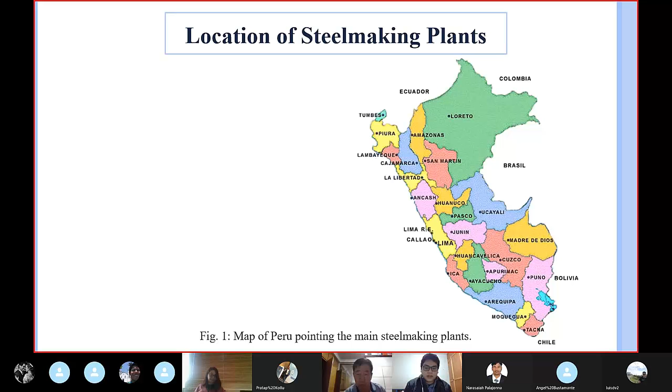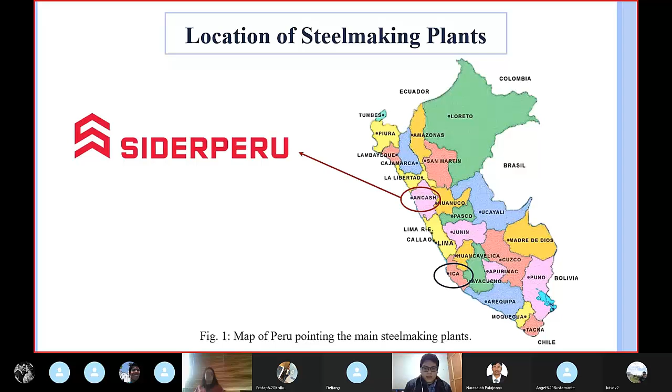Let's start with the most important point, that the production of steel is an important indicator of the development of a country. This is a map of Peru, where I live, which has two main steel making plants: one located in Chimbote, in the region of Ancash, that's SiderPeru, and the other located in Paracas, Ica, that's Aceros Arequipa.

Let's start with SiderPeru. I want to tell you a little story about it: it was founded as a national company during the government of Peruvian president Manuel Odría. It remained a national company for many years. However, in 2006, Gerdau, a big Brazilian company specialized in steelmaking, acquired more than 85% of the shares. So nowadays, SiderPeru is more Brazilian than Peruvian.

To produce steel, there are two main ways: one is to employ the blast furnace, and the other is using electric arc furnaces. In the case of SiderPeru, the blast furnace is not operating due to financial problems, so it's cheaper to import the product than to produce it here. Because of that, the blast furnace is not operating, so what SiderPeru does to produce steel products is use the other way: the electric arc furnace, employing scrap.

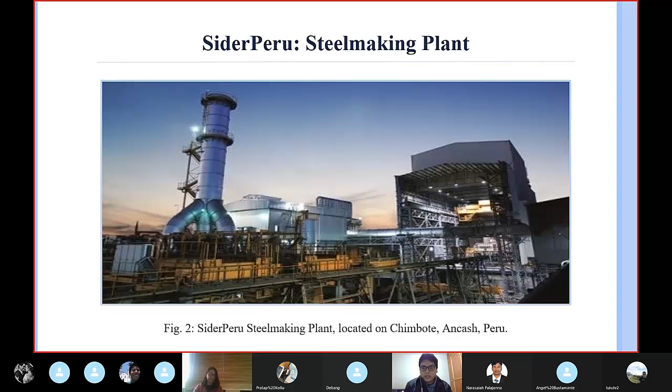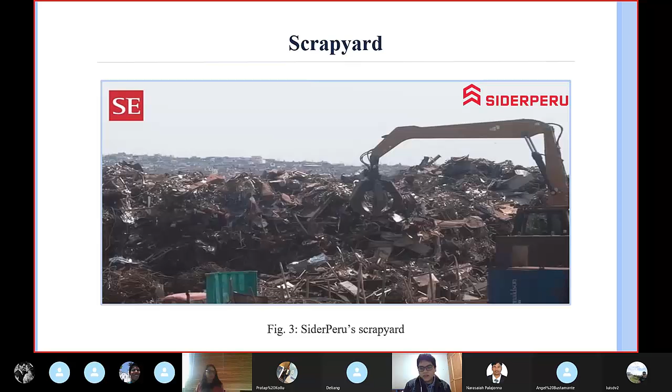What SiderPeru does here is recollect and reduce the size of the scrap. So once the scrap is reduced in size, it goes to the electric arc furnace.

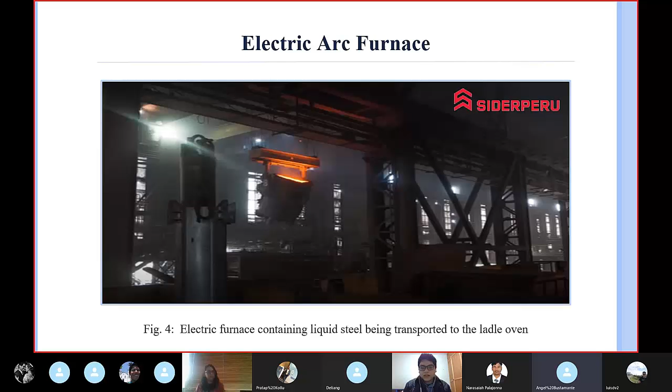But before talking about the Ladle Oven, I want to mention that during this stage in the electric arc furnace, we obtain two types of slags: one from the gases that the furnace emits, that is type 1, and the other are black powders that settle on the bottom.

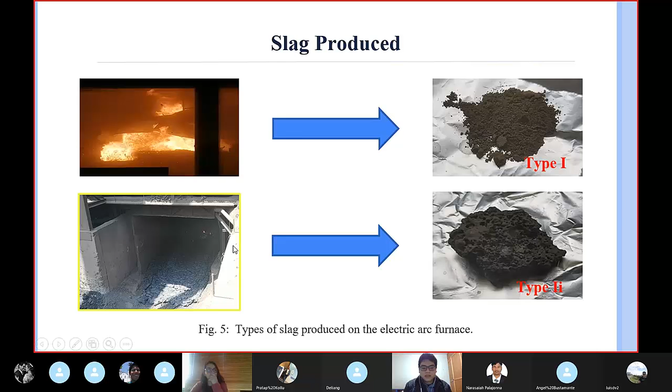Continuing with the process, the liquid steel from the electric arc furnace goes to another oven called the Ladle Oven, where samples are taken for chemical analysis. Here you can appreciate on the surface a layer of slag, which occurs because slag has less density than the liquid metal, that is, steel.

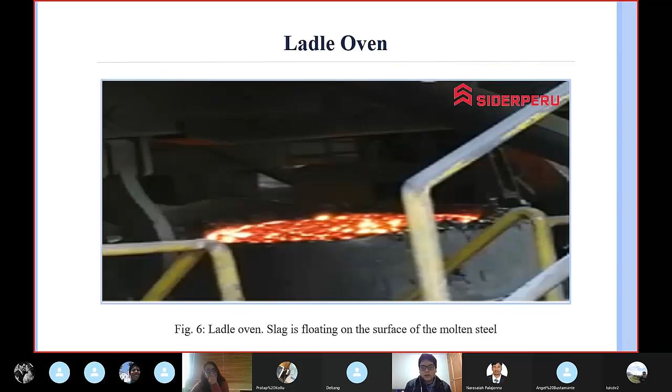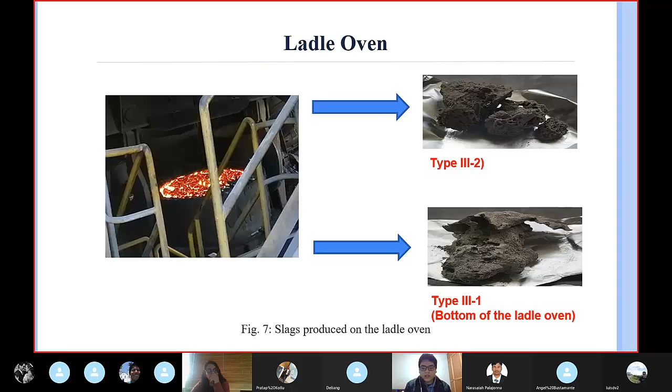It's important to do this chemical analysis because it determines the quality of the steel. A steel with bad composition cannot be sold because it doesn't comply with certain rules and laws required for its functions.

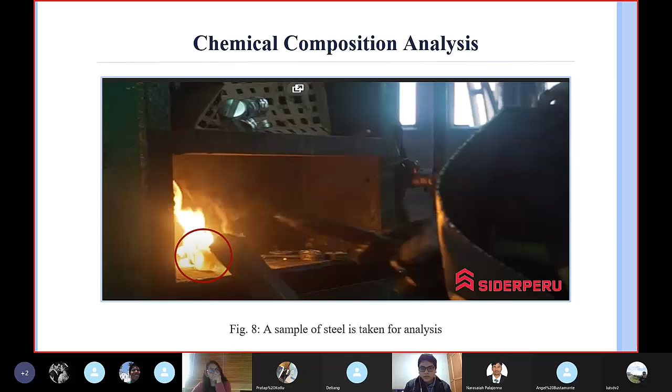When the chemical composition is correct, it goes to the continuous casting process, where there's a distributor, and they produce billets.

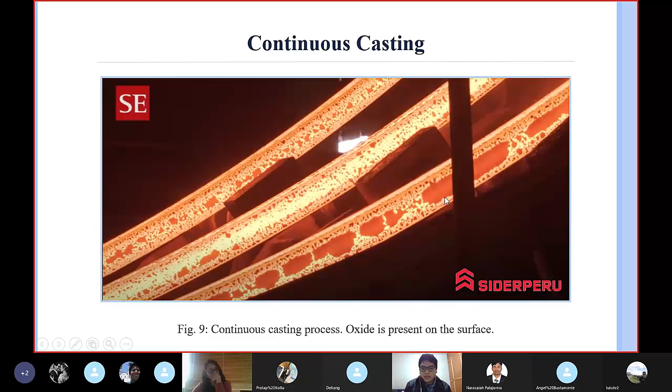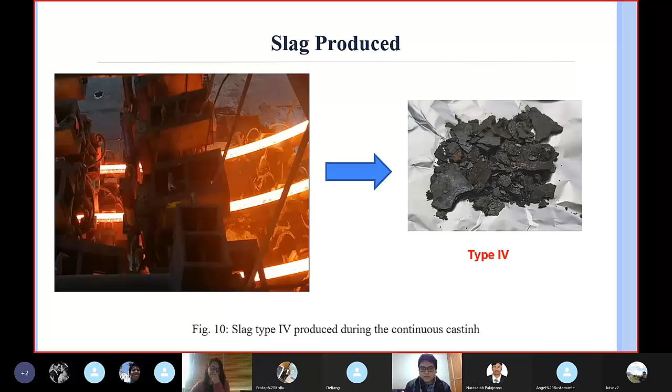Something important to notice is that the billet, at high temperature, reacts with the oxygen from the air, and you can see there are some scales that are oxides. Those oxides produced on the surface as scales are the type 4 sample.

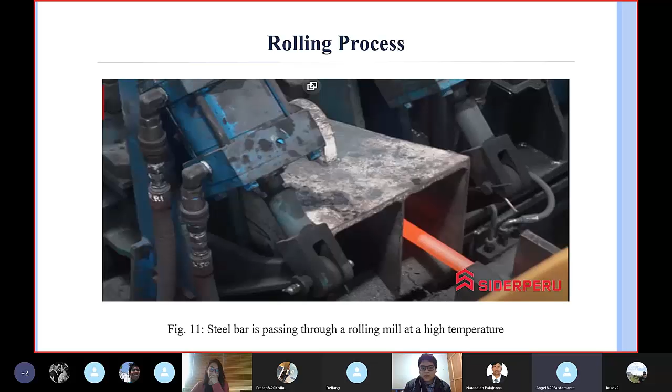Okay, so after the continuous casting, it goes to a rolling process. First, it's a rolling process at a high temperature, known as hot rolling process, and that's important to mention because at the high temperature it's easier to make these bars, because it offers less resistance to be deformed.

And here we can see the rolling process at a low temperature, known as cold rolling process. Steel making plants do this process because it permits us to give the steel better mechanical properties and a better surface.

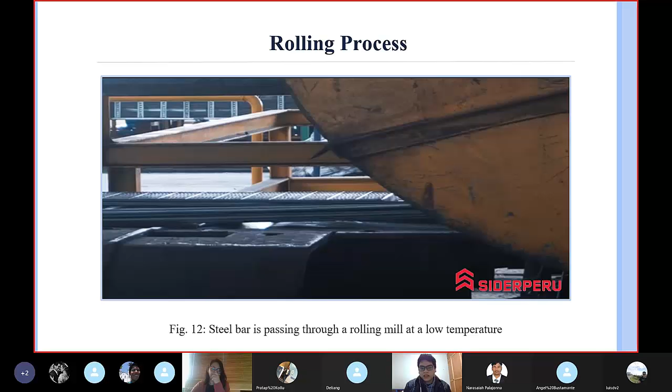And that's the main product of SiderPeru, the corrugated steel bars. They are used for construction, basically.

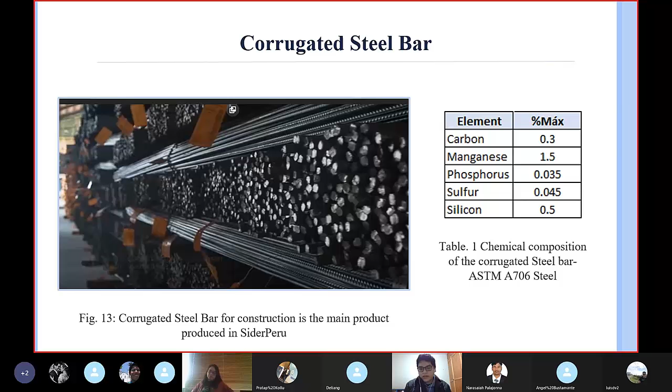In this table, we can appreciate the composition of the corrugated steel bar at SiderPeru. It's an ASTM A706 steel. I just want to mention that in some chemical compositions, they don't include the iron, because the balance to complete the 100% is iron. So because of that, they don't mention it.

Okay. The other main steel making plant in Peru is Aceros Arequipa. This is a picture of the plant in Pisco, located in the region of Ica, Peru. Something important about Aceros Arequipa is that some years ago they had another plant in the region of Arequipa, in the capital of Arequipa.

But in 2016, they had to close the plant in Arequipa because of some problems in the market, because they couldn't compete with other kinds of steel that were cheaper. So the company focused their efforts on the plant in Pisco.

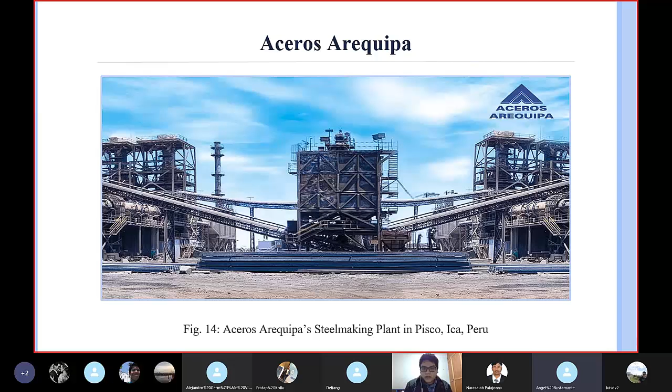Okay, so Aceros Arequipa employs some raw materials to produce the iron pig, that's another component to produce steel. They also use scrap. But let's talk about the direct reduction process.

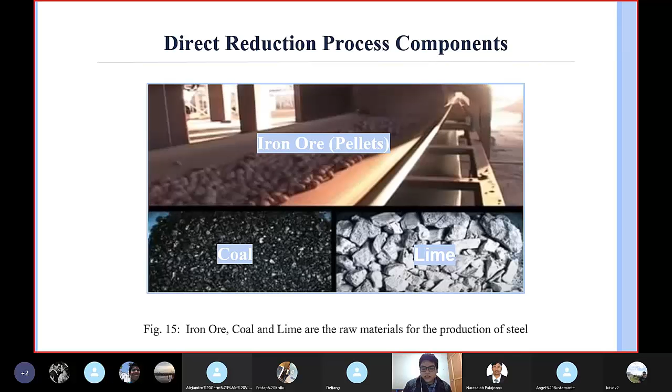Let's start with the components. They employ the iron ore in form of pellets, coal, and lime. So these materials go to a rotary kiln to produce the iron pig, that's a first form of steel, but it contains more carbon than steel.

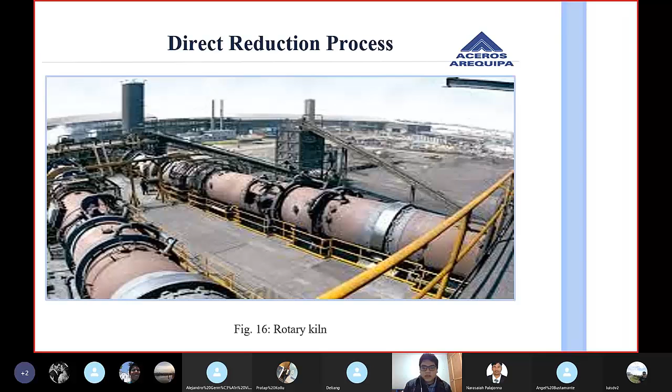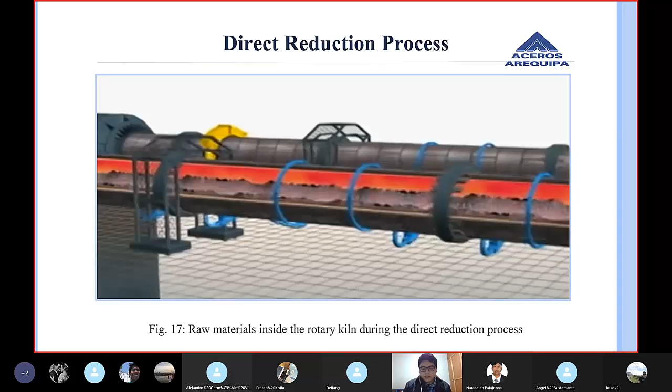So the objective of this rotary kiln is to reduce the iron that is oxide. The objective is to take away the oxygen present.

Aceros Arequipa, as I mentioned before, comes with a scrapyard. And as I mentioned, they classify the scrap because it contains different alloys and materials, and it's important because it has some consequences during the process.

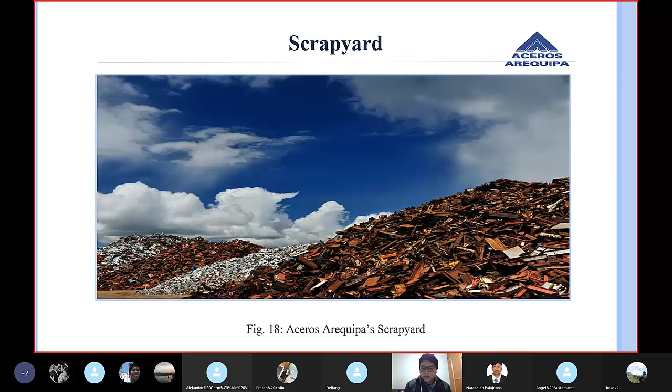And Aceros Arequipa selects the scrap and reduces the size. The iron pig and the scrap go to an electric arc furnace that also employs 3 graphite electrodes to melt the pig iron and the scrap.

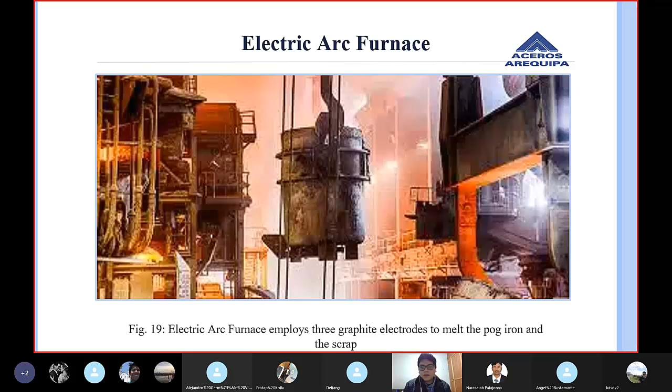So when the steel is molten, it goes to a ladle oven in which they take some samples to make the chemical composition analysis, and they check if the chemical composition is the correct one. If it isn't, they add some ferroalloys to give the correct composition.

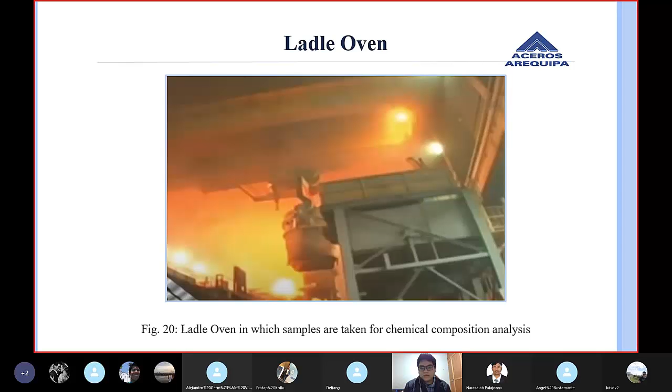When the composition is correct, the ladle oven is moved to a tundish, also known as distributor, to make the process of continuous casting.

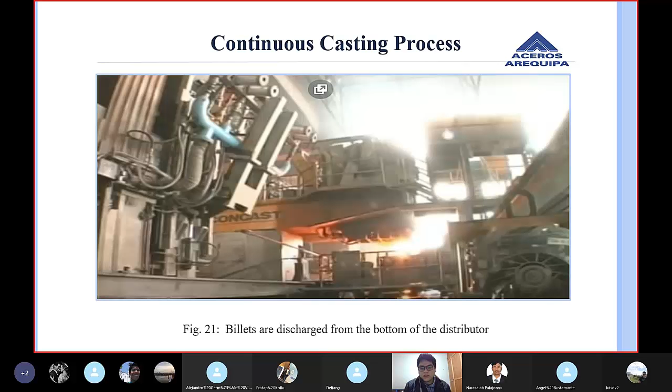During the continuous casting, as you can see, they produce billets, and they pass through some rolling mills to reduce the size of the billet and give them the shape of a bar.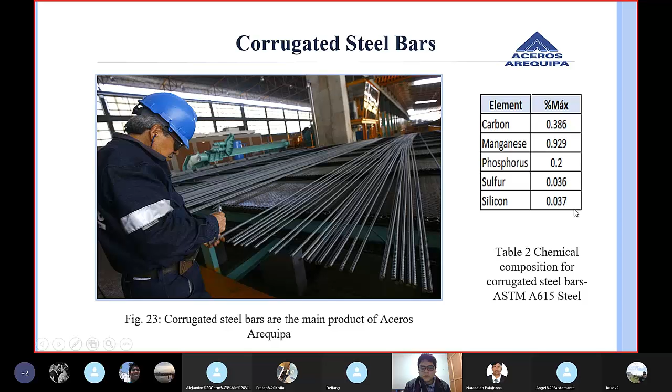Just to conclude this presentation, let's check some conclusions. The Peruvian steelmaking plants represent a great opportunity for us, for investigators, to optimize their process.

As you can see during the presentation, the blast furnace in SiderPeru is not operating anymore. Aceros Arequipa had to close the plant in Arequipa. So there is an opportunity to optimize the process and make these companies profitable.

SiderPeru also has other products like round steel bars, steel angles, and steel square bars. So it depends on the rolling mills to produce these products.

In the case of Aceros Arequipa, they also produce wire rods, steel tubes, steel tees, and steel profiles. It's the same, they depend on the rolling mill process.

We can say that the main difference between SiderPeru and Aceros Arequipa is that Aceros Arequipa continues using raw materials, like iron ore, coal, and lime, to produce iron pig and then make the steel. In the case of SiderPeru, it only uses scrap, just scrap.